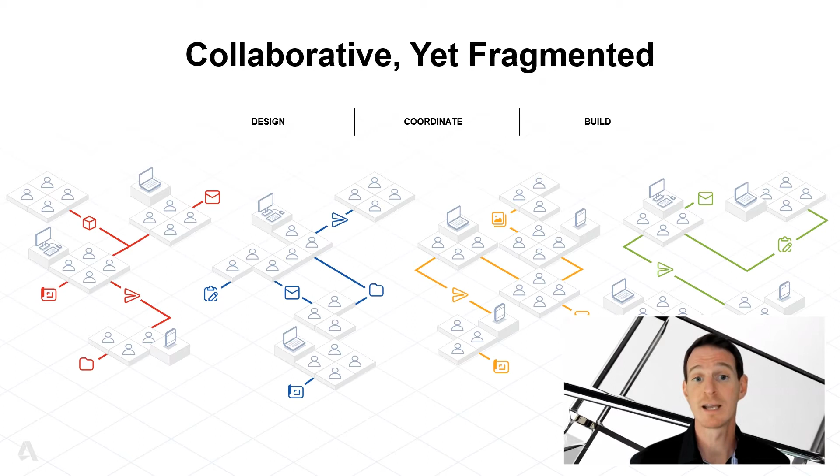The new possible lies on connected construction. Permissioned common data available to everyone that needs access. See the impact of changes being made by other teams. Automated clash detection for self-checking. Empowering design and trade teams to improve the quality of their models. Connection and flow of data to the field.

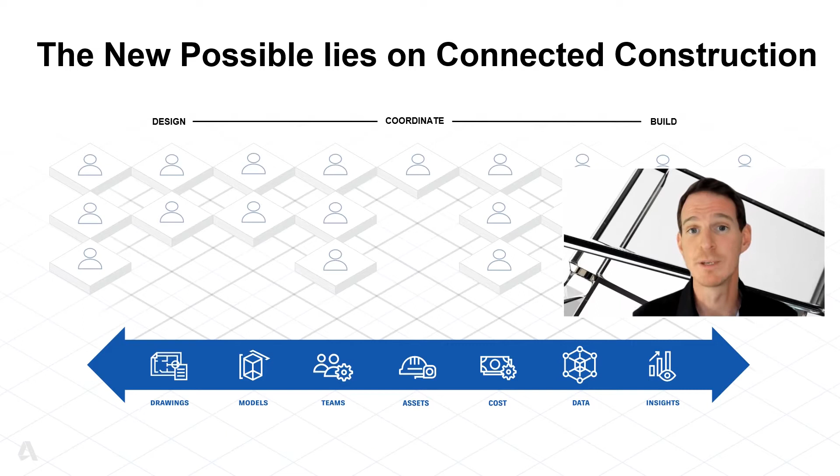Assign, track, and review issues from multiple apps. See the history throughout the project. Ask relevant people for more information. Provide integrations and connections with third-party tools. All of these things together give the platform its strength. This is what better communication looks like.

Connected issues provide a common language or a vehicle for communication across different apps and users. A common data environment connects teams across tools and phases. Pre-construction, project management, and design tools all have access to the same issues layer. Issue status and responsibility are highly visible across the project teams. Issue details and context persist from design to the build phase. And those design tools, often required to resolve issues, store their data in the CDE.

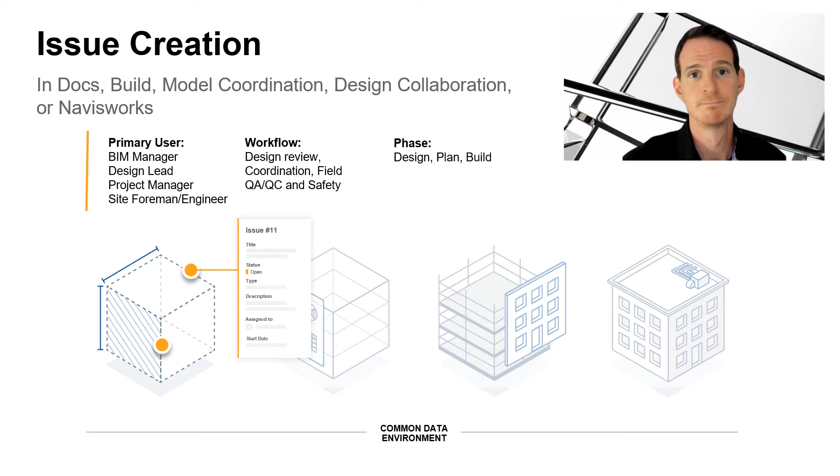Issue creation is available in the various apps used by team members whose role it is to look for potential problems, aiming to capture these before they become real problems. Issues are then available to all those users and more within their appropriate app environment, where they can review and edit details, add comments and questions, and ultimately assign for resolution.

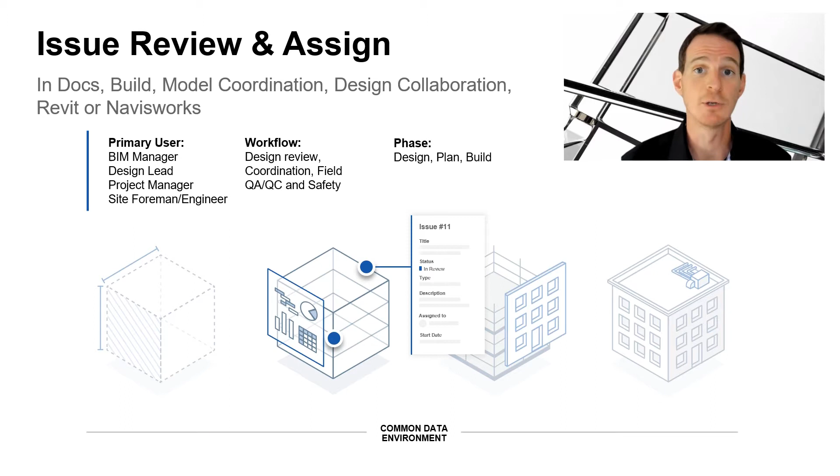Issue resolution may take many forms. It may simply be a response to a general question or a housekeeping task on site, itself being identified by the issue type. Or it may require a design modification, where the issue needs to communicate appropriate context to a designer or engineer.

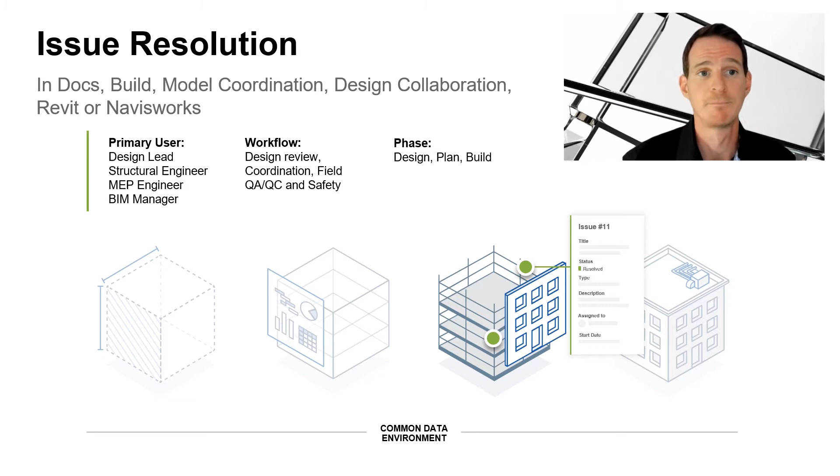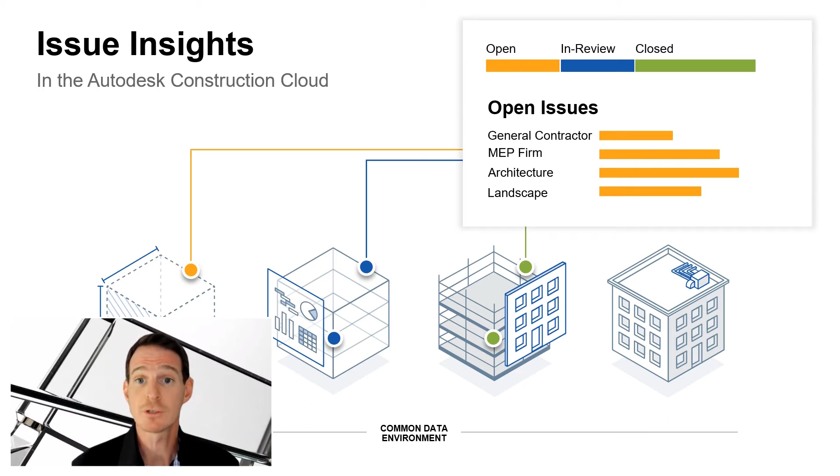With all of this data being gathered centrally across all phases, it starts to build up a picture of the project, what's happening where, who's involved, whether parties are responding to and addressing the issues being captured. When you can see who an issue is assigned to and know that they're working to resolve it, or you send a question and get a response, it helps to build those relationships and trust. It fosters collaboration and it encourages working together to solve problems.

Enough of the theory. Let me show you how all of this works.

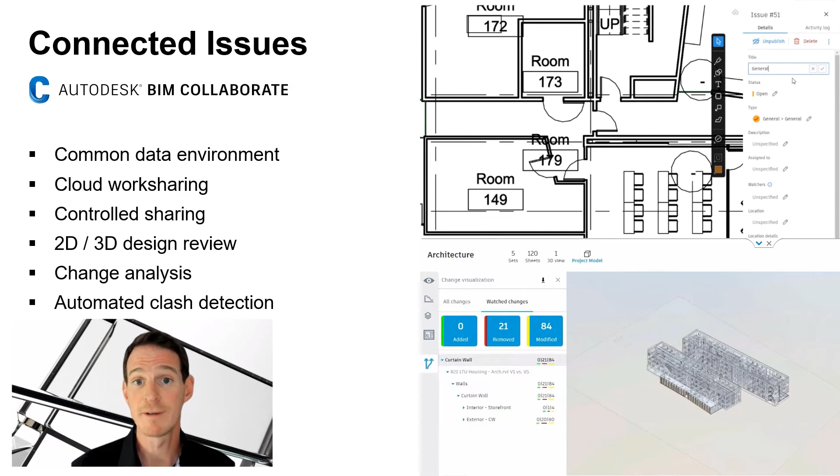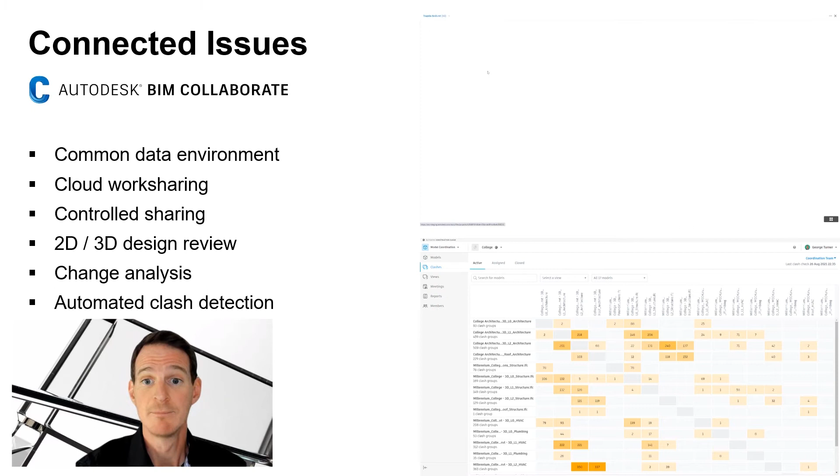Autodesk Docs provides the platform and common data environment for managing project data. Revit Cloud work sharing, collaboration for Civil 3D, collaboration for Plant 3D, and Advance Steel can all natively store data in the Docs CDE. Design collaboration enables controlled sharing between teams, where you can review packages of 2D and 3D content. Automated change analysis can advise on newly added, removed, or modified content between versions. And model coordination enables multi-format, multi-discipline aggregation with support for Revit, DWG, IFC, NWC, and VUE formats. And automated clash detection, think of this a bit like spell check, can assist teams understand conflicts within their own models.

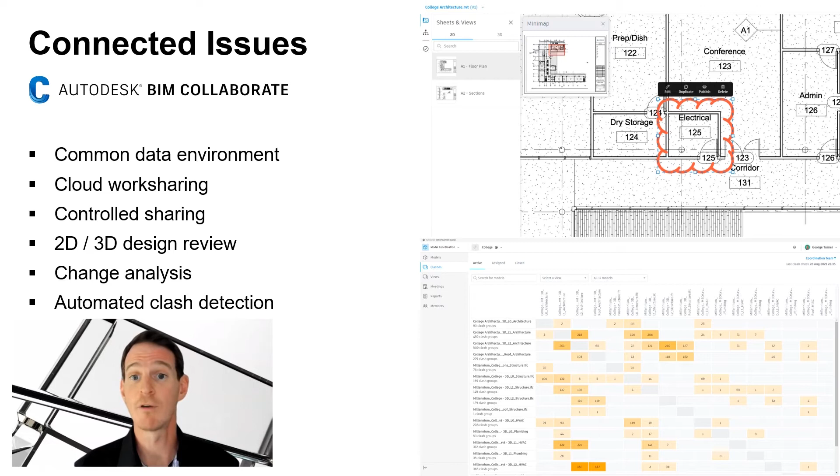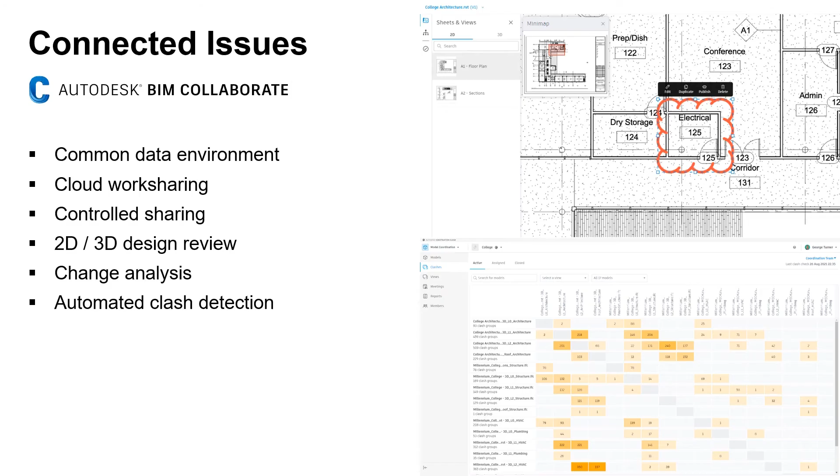The automated clash detection and controlled sharing capabilities of BIM Collaborate gave WSP Canada the opportunity to try a new clash avoidance workflow. Working with Bird Construction and Autodesk, they developed a workflow that saw all designers spend around 15 minutes each morning reviewing the clashes with the area of the project that they were each working, and directly fixing these in Revit. This was ahead of sharing their latest models with other teams at the end of each day.

This iterative approach to constant model quality improvement is conservatively saving a 20 to 30% reduction in BIM managers' time. And that's not to mention the massive suppression in noise observed by other teams and reduction in issues going forwards to coordination meetings. This workflow has been implemented on 10 to 15 projects so far. Please refer to the class handout where I'll go into further details.

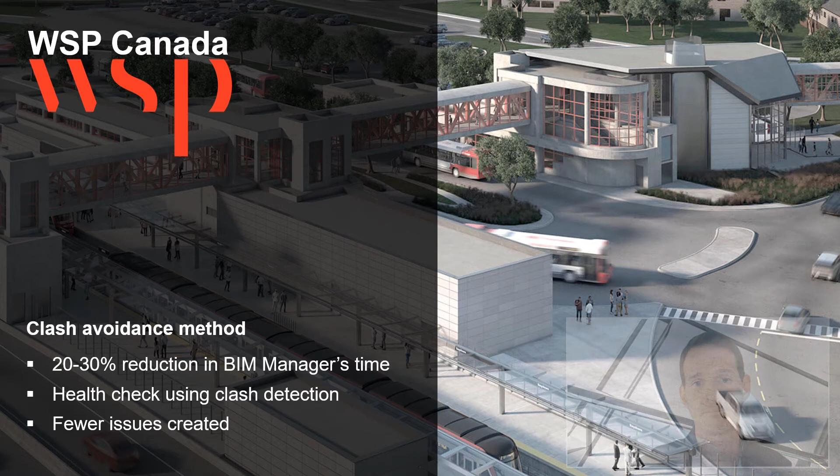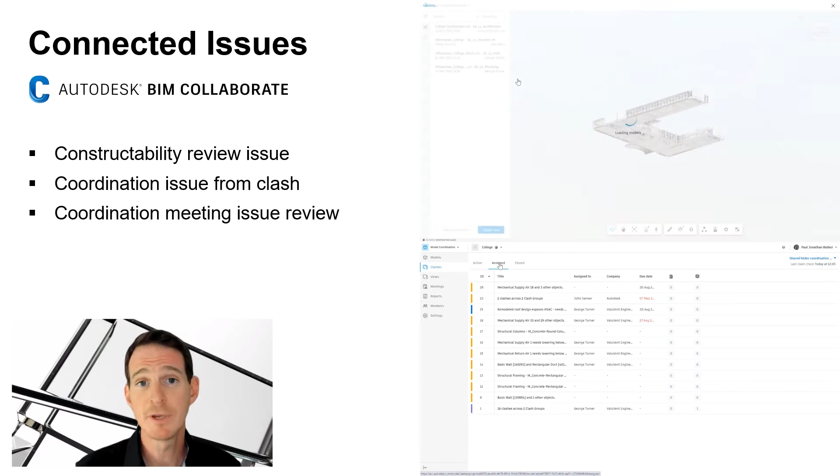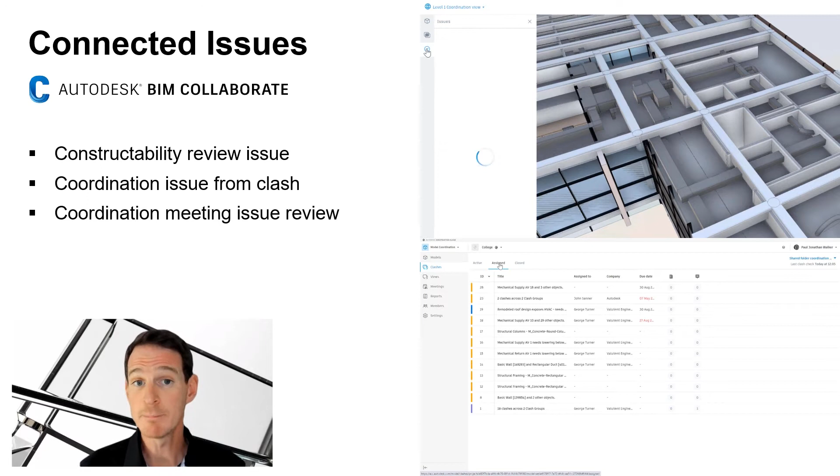There are two primary workflows in model coordination: constructability review and clash management. You can aggregate and review any combination of supported models and save these as a composite view, either to be used by all members or something specific for yourself.

You can then navigate through the models, accessing object properties and so on, looking to see whether the combined design works practically, whether it can be built or maintained, depending on your role in the project and the perspective that you bring.

You can capture any observed problems as an issue, assign it to someone on the project, set a due date and other attributes, and add comments and questions.

Notifications will be sent to appropriate project members where they can access the details, a screenshot for extra context, and also be able to respond.

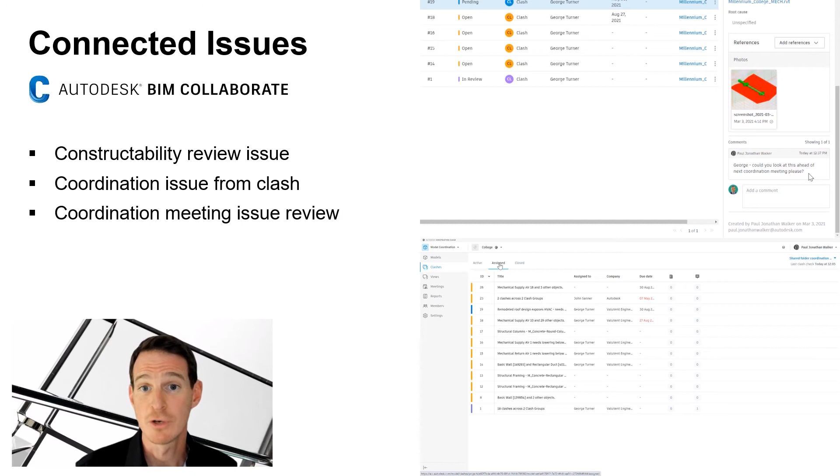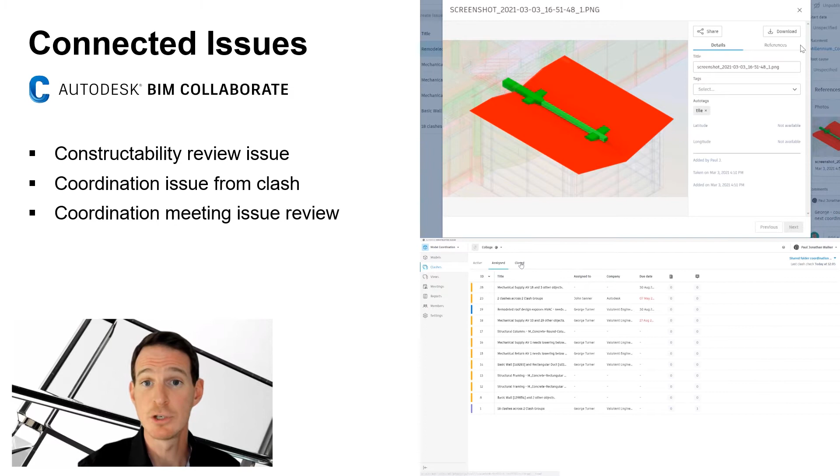Identified clashes can be assigned as an issue or closed as not an issue, where no remodeling is required, for example. Active clashes are displayed in a matrix based on the authored model files and published 3D views.

These can be filtered to focus on a specific area, either by naming convention or a predefined composite view.

Further grouping and filtering tools are available to refine how you wish to review the data, including tolerance, where you may want to focus on bigger clashes at the earlier design stages and tighten during trade coordination.

Clashes by default are grouped by object, with you controlling the primary model. This means all clashes with any HVAC object, for example, can be treated as a single clash group.

Alternatively, you can choose other grouping methods, including using type name, system name, or layer name for DWG files. The grouping options will adjust based on the primary model file type. The effect is to group related clashes so that they can be dealt with as a single issue.

With a problem clash group identified, you can create an issue, specifying the object most likely to be modified to resolve the problem.

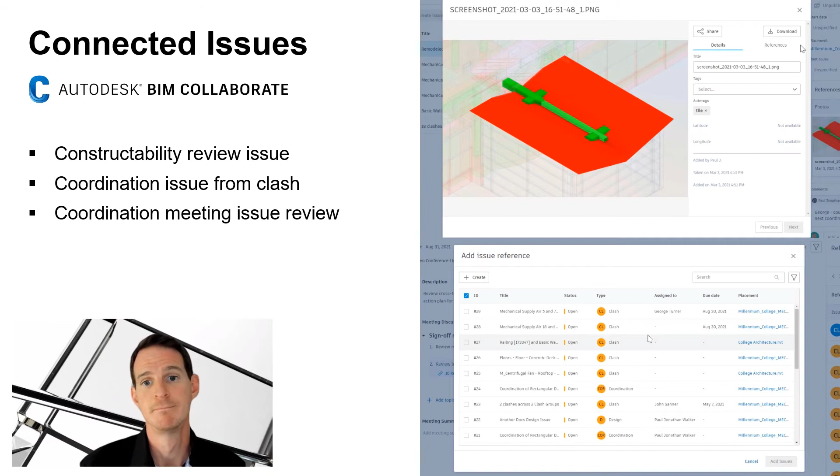Autodesk Navisworks can open and append content from model coordination, enabling additional user-defined analysis from clash detection to 4D simulation in its familiar interface for many power users.

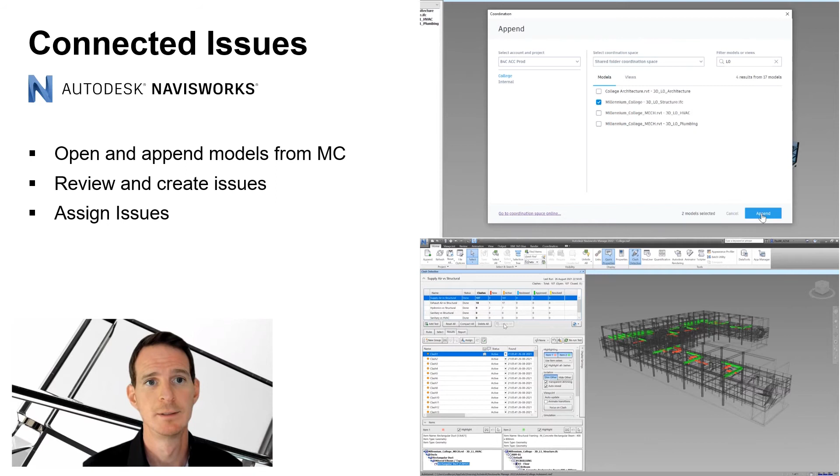All Navisworks tools can be used, including creating search sets and then using these to define specific clash tests with specific rules. These clash results can also be grouped and marked up.

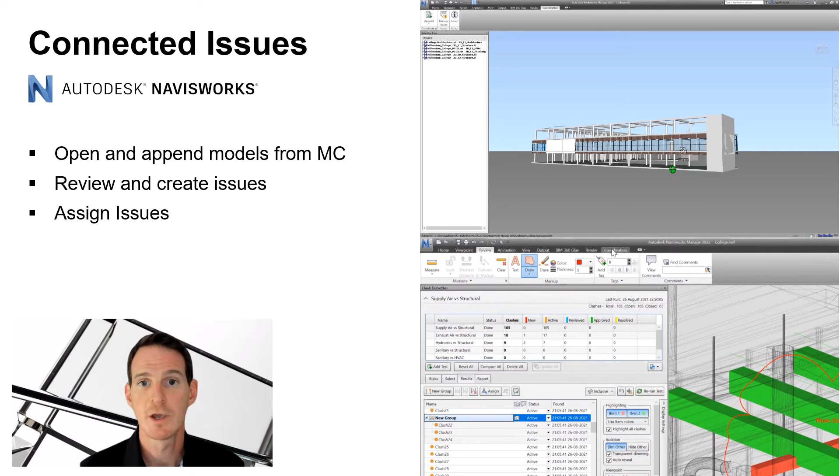Navisworks is also integrated with the Common Issues service, enabling review of issues created elsewhere in the system, or you can directly create issues here, with access to the same data fields, assignees, and a screenshot is also captured, including any markup.

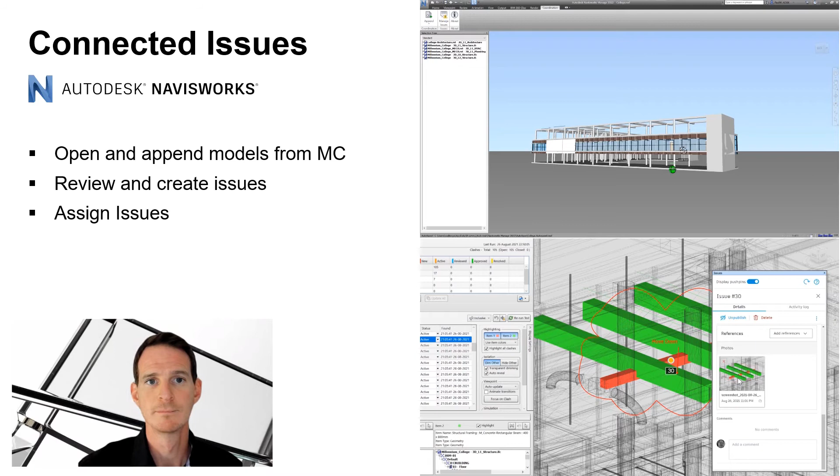Issues may be associated with a version of a file in another folder, due to control sharing workflows, for example. The issues integration within Revit enables issues to be loaded from multiple folders to account for such workflows.

Issues can take you directly to the 3D view in which the issue was created and set the camera view. And all issue details are accessible, including screenshots for context.

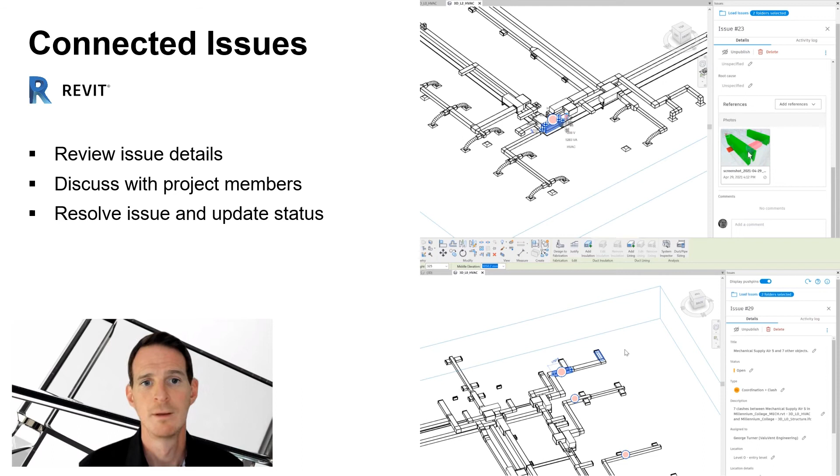With the associated object selected, you're ready to resolve the problem in whichever Revit view is most appropriate. As Revit works at a connected system level like this, moving a single object will automatically adjust the relevant system elements too.

After making changes to the model, you can then change the status of the issue and add comments and reassign the issue if necessary.

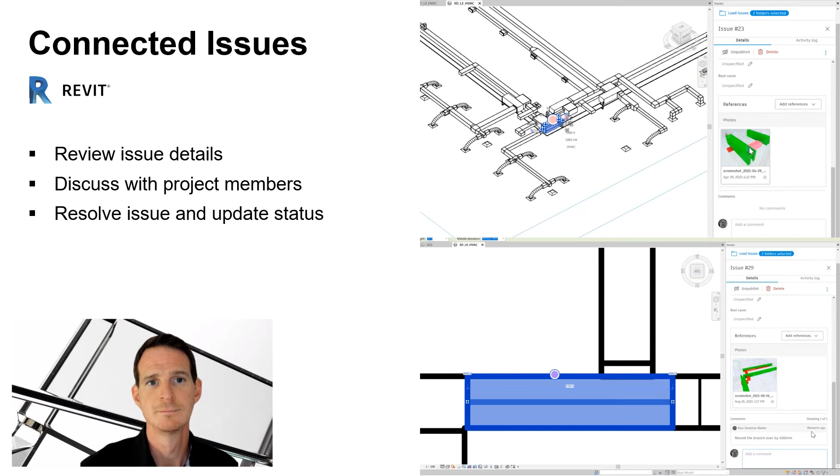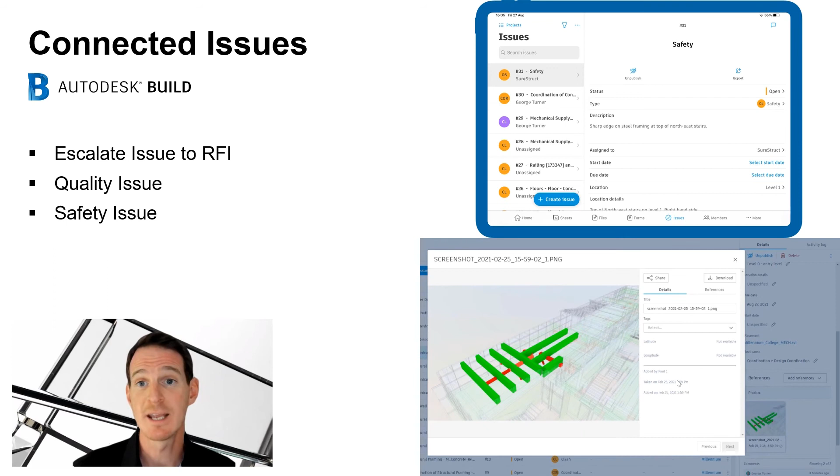Autodesk Build provides web and mobile apps for capturing issues during the construction phase, including quality and safety issues, for example. Build includes a full issue log with access to issue details, screenshots, and photo attachments.

Build also provides project management tools for assets and RFIs. During pre-construction, if an issue cannot be resolved amongst the project team, it may be necessary to escalate an issue to an RFI. This capability is directly integrated into the issue experience, where you can either reference an existing RFI or create a new one.

RFIs can be configured for specific permissions and workflows, including additional reviewers. Each RFI will have a single person identified at any given stage to be clear who has the ball in their court.

Once your question and suggested response are added, the RFI will be linked to the issue and its predefined workflow kicked off.

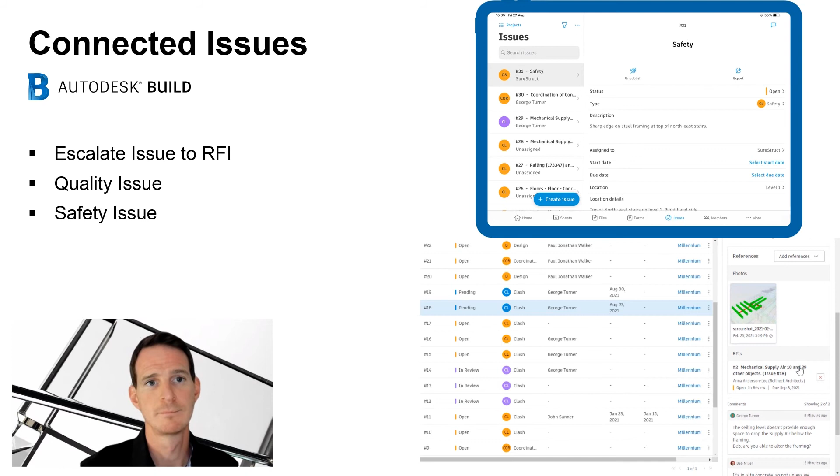Insight provides dashboard-style presentations of project-level data, analytics, and predictive insights. These can help to understand what's going on in a project, looking for trends or patterns, and trying to identify any gaps or problems.

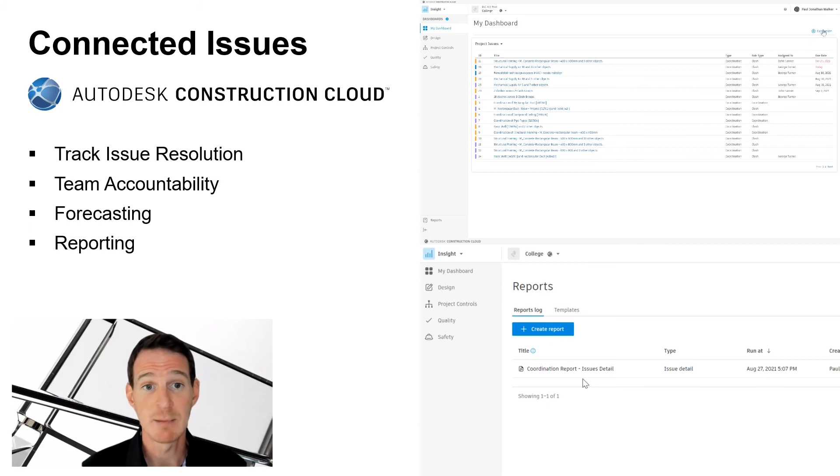Dashboard cards can include issue status and assignees, design packages, RFIs, and so on. There are predefined dashboards, or you can create your own with access to the data that you're interested in.

This also includes a vast number of partner cards, such as Microsoft Power BI, where you could configure further analysis based on your project data extracted through our data connector, which makes it even easier to get your data out.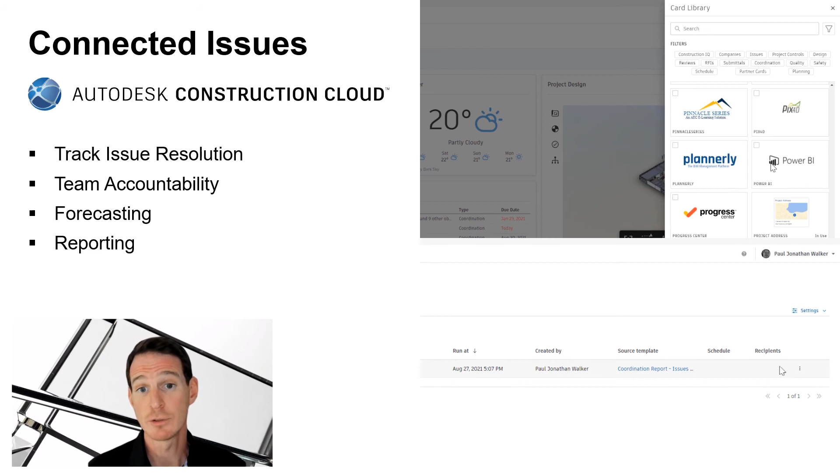Issue reports can also be scheduled to run and sent out to specific project members, keeping everyone informed of open issues and commitments.

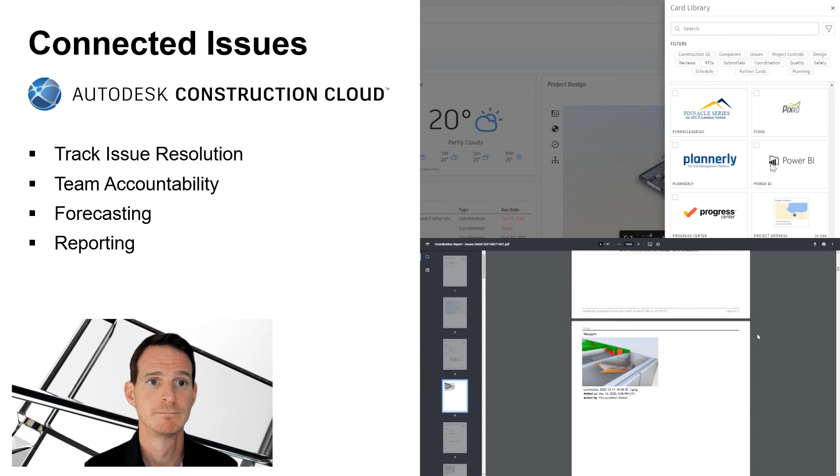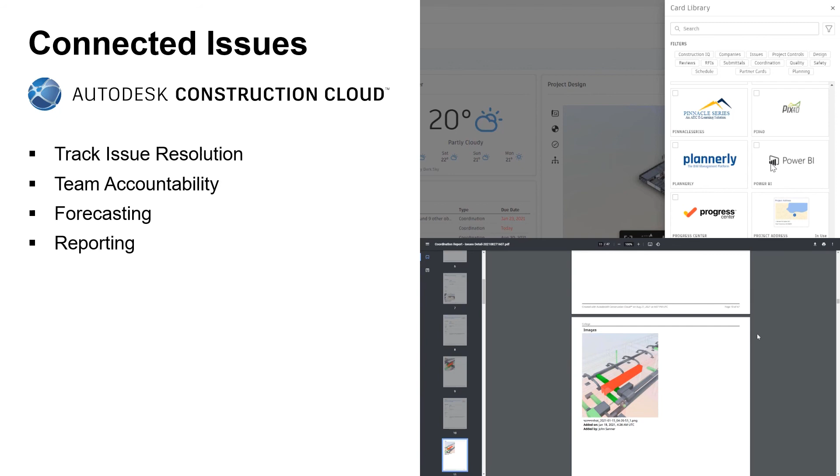What I've been discussing today isn't hypothetical. Similar to the workflow of WSP Canada that I mentioned earlier, let's hear this in the words of one of our customers, Lee Ramsey.

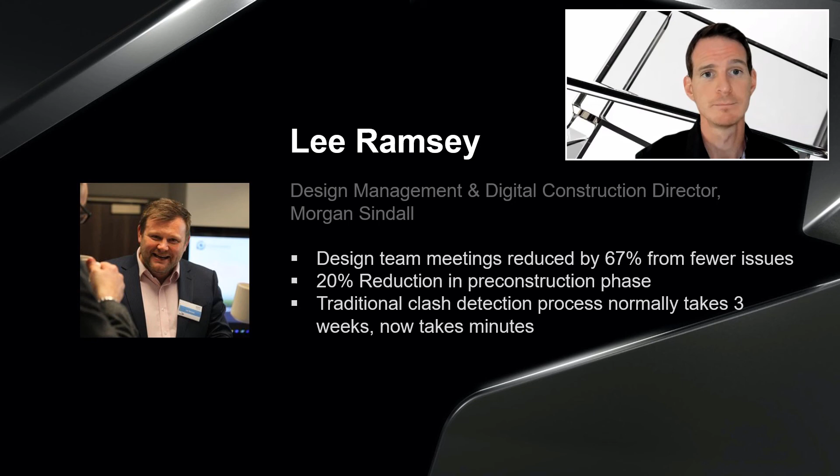My name's Lee Ramsey and I'm the Design Management and Digital Construction Director at Morgan Sindall.

Autodesk Construction Cloud has been helping us improve the design management processes and model coordination. We've seen improvements in productivity and outcomes, helping our teams handle further capacity. These benefits have transpired in many different ways. We've seen the design teams take on more ownership of the information that's being produced.

Each member automatically clash detects the work before issue. It's a bit like spell check. Design meetings have taken less time. We've seen a lot fewer comments when reviewing 2D outputs, and issues are addressed at source in the 3D model.

For example, design team meetings have been reduced by 67%. The synchronization of models, and uploading and downloading models, has been reduced by 78%. What has taken hours is now taking minutes.

All parties are seeing the design as the design develops, almost in real time. This has reduced abortive design work.

The model coordination comparison tool has been a significant benefit, and design members have seen a 50% time saving in identification of change, as everything is visible.

We've seen the time to review information reduce. For example, we've seen a 20% reduction in our pre-construction phase, and a 20% improvement in time to upload models to coordinate with other disciplines.